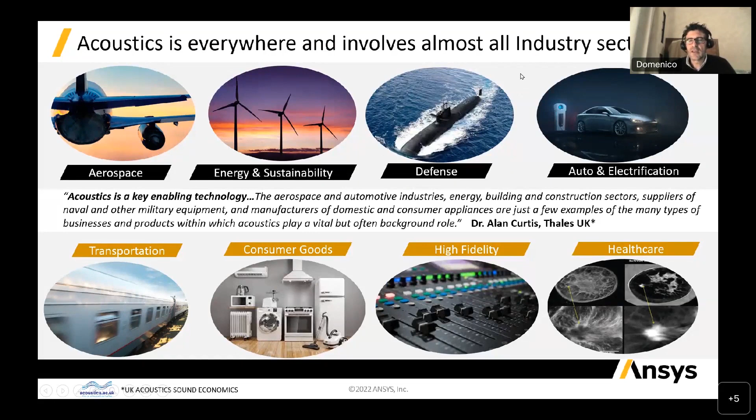So in the next few slides, I want to give some highlights about these trends in a few industries where we see some more interesting new things emerging. So the first one is...

Aerospace and defense. What we see here as requirements driving the industry is really more stringent regulations for noise emissions. We see this both for civil aircraft, but also more regulation about airports, since airports are sometimes quite close to cities or populated areas. So it's not just about comfort and noise levels in the airports, but we also see increasing demand from customers - people are getting more used to quieter environments. Even in our day life in a car, and when we go into an aircraft, we are more sensitive to this compared to 20, 30 years ago.

We see also some very interesting trends that are emerging and are not consolidated today, but we really see this going in the future. It's a future for us as a consumer, but is already a reality from a design perspective. We have lots of customers, and we see already in the industry lots of research projects about hybrid electrical vertical takeoff and landing - what we call eVTOL vehicles - which could be used as city taxis, for example, in the near future. So even though we don't still see them in our cities, big companies are already investing in it and simulating this, because it will also be important from an acoustic perspective for noise emissions in cities.

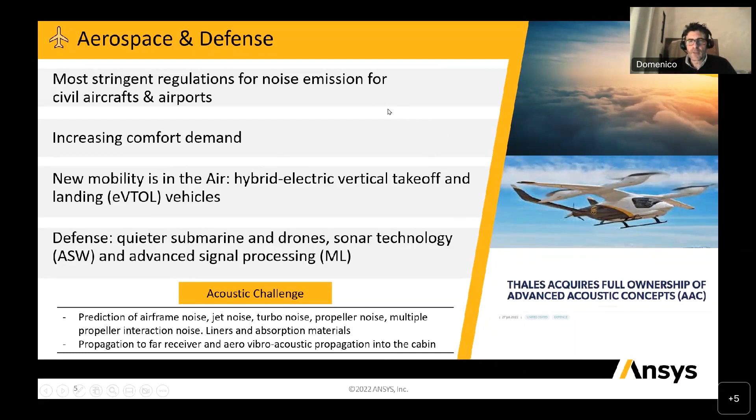To confirm the strong interest in all this, we have multiple research programs around the world. I won't go into details, but for example in North America, at NASA, just looking at the first line of this table shows how aggressive the target is. For noise emission, the target of this AATT project from NASA is to reduce noise levels by 32 decibels by 2025, which is really huge.

But their target goes really beyond that, going from 22, 32 up to 32, 42 decibel reduction, even up to 50 decibel reduction. This is really massive. You can see the perspective in the long run, up to the next 10, 15 years.

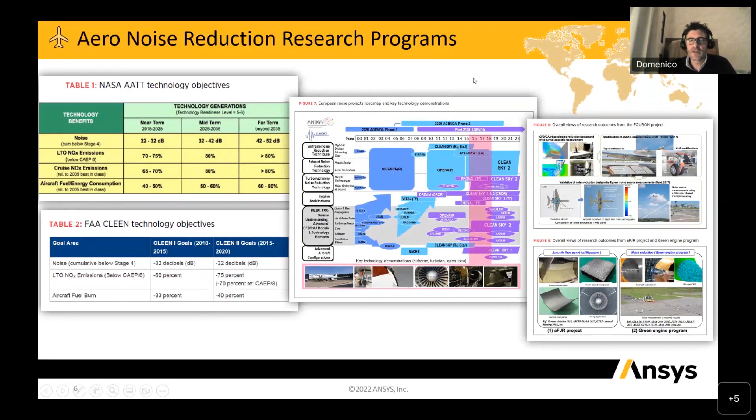In the central picture are some projects from Europe, and very important is the so-called Clean Sky project, involving all kinds of noise research to reduce noise. On the right are some projects from Asia, which are on the same line as the previous ones. So there's lots of investment in this area, and lots of cascade technologies that can go into different industries, as always happens with aerospace industries.

The second topic I want to talk about, which is maybe one of the big experiences in our daily life, is about the automotive and transportation industry. Here, as Dr. Venki was introducing, we see a new challenge - electrification, which is posing a completely new perspective in terms of acoustics.

On this right-hand picture, the first plot shows the internal combustion engine noise sources. In classic cars with a petrol engine, you see that half of the noise is coming from the powertrain, and then you have other noise sources like road tire noise and wind noise. But once the vehicle becomes much quieter, as in the plot below, with electric powertrain becoming smaller in terms of noise amount, all the other noise sources become more relevant - this is quite interesting.

So now we are all more interested in these other noise sources, in addition to the different kind of noise coming from the electric motor. Also, sound quality is now perceived more and more as an indicator of car quality. Before, as you might remember and experience, only the segment of luxury cars had this capability to be very good in sound comfort and quality.

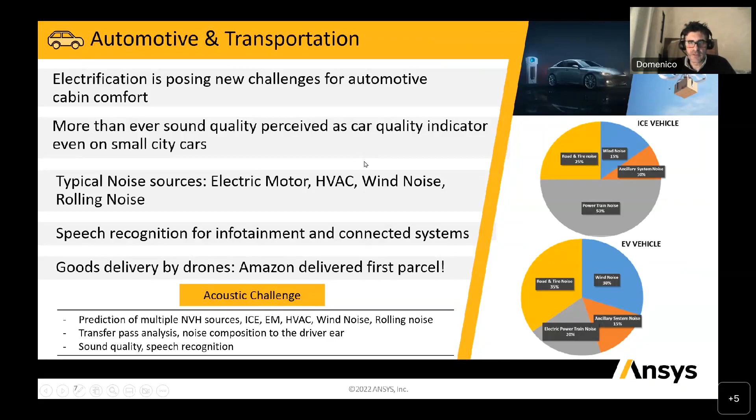And then, as I said, sound quality and speech recognition are the other challenges. The other trend we see emerging is really related to sustainability and energy.

Examples you can see in these pictures are like wind turbines, but wind turbines will not only be in this very picturesque setting on top of a mountain, they are becoming more and more pervasive all around, including in populated areas. And it's not just one, generally there's a numerous number of wind turbines put together in a big plant.

So this is becoming more important. Sustainability is creating more sensitivity to these aspects, and so there are now more regulations, not just about pollution in terms of CO2 emissions, but also in terms of acoustics.

The other thing we see as a future trend is smaller, house-mounted wind turbines, which could be mostly vertical, but we have also seen some horizontal examples.

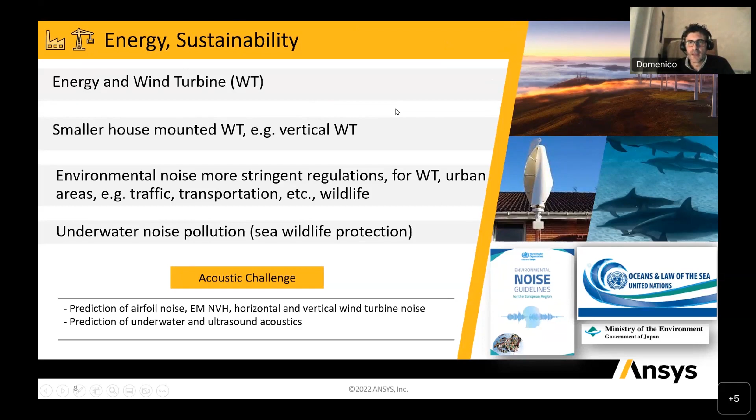And with this, I will pass to Patrick to go more into the detail of acoustic sound aspects.

Thank you very much, Domenico, and thank you SAE India for giving us the opportunity to present the challenge of acoustic and NVH for India, and for all Asia. There is no doubt today, as Domenico mentioned, that noise pollution has a growing importance. We can see many articles and papers explaining why noise pollution has become a major problem for human health and for the environment. Let's go a little bit into the details of the effect of noise on health.

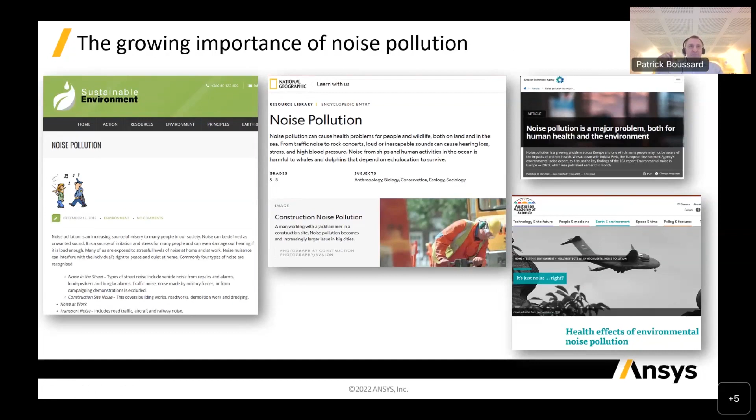One of the most evident effects of noise on health is hearing loss. If you lose partially or totally your hearing sense, even until being deaf, it really affects your life. This happens to workers who have worked all life long in factories, for instance. Now the trend is to have better monitoring of noise level in factories and for workers, and it's more controlled, but we should still be aware that this is the most evident effect of noise.

But noise also has a lot of effects that are not always evident, such as disease and psychological disease, for instance when it affects the quality of sleep. Concentration or learning trouble can be a side effect of bad sleep. It's difficult to learn or to teach if you don't have good sleep, but it can also be a direct effect if the school is close to the airport or a highway with low isolation.

Then it's evident that all these troubles have a social cost, an economic cost, and also an industrial cost.

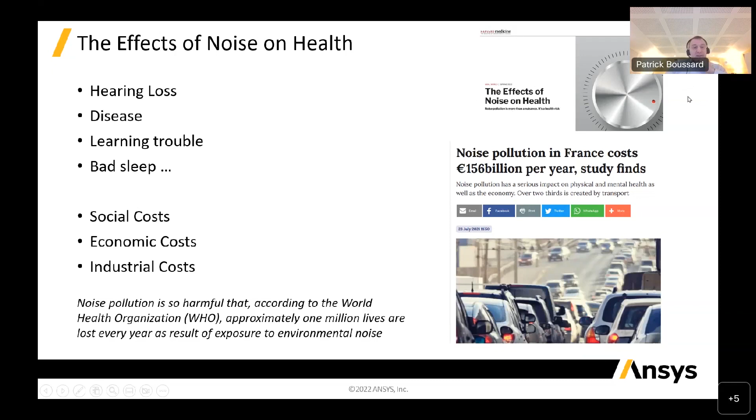Well, saying this, let's see the advantages of acoustic comfort, better soundscape, and noise control. For sure, all that we saw previously regarding health effects will be highly reduced or totally avoided. Better concentration is one of the most important effects if you have a quiet room where you can work or learn. Also, hearing conversation and better communication is definitely one of the most evident benefits - it's difficult to speak when it's noisy, and it's difficult to communicate even with an active noise cancellation system in a noisy environment.

Another way acoustic comfort and a quiet environment help is that they allow us to just listen and enjoy the environment and the natural soundscape. Reducing noise annoyance also helps to preserve nature and wildlife, as Domenico just explained with the dolphin for instance.

Another advantage of acoustic comfort and a quiet environment is that we can use sound to bring information, to bring pleasure also. We can create sound to be an alarm to warn pedestrians for electric vehicles, for instance, and this sound will be clearly audible - something that cannot be achieved if the soundscape is too noisy.

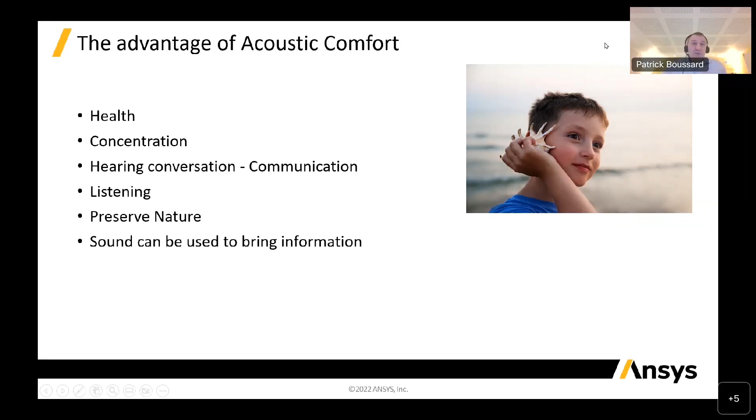Then, moving from noise pollution towards sound quality is a long journey, a big challenge, and it can only be achieved step by step.

And we have different steps toward acoustic comfort or quieter noise. Next, please.

This is already a big step. The next step is when we reach sound quality. Reaching sound quality is the ultimate challenge when you are an acoustic engineer, an NVH engineer: to master the sound. We want you to be a kind of chief orchestra, no more just dealing with noise pollution or quieter noise, but also controlling the noise and giving your product a brand identity. We want you to be able to control and master the noise as if you were a chief orchestra.

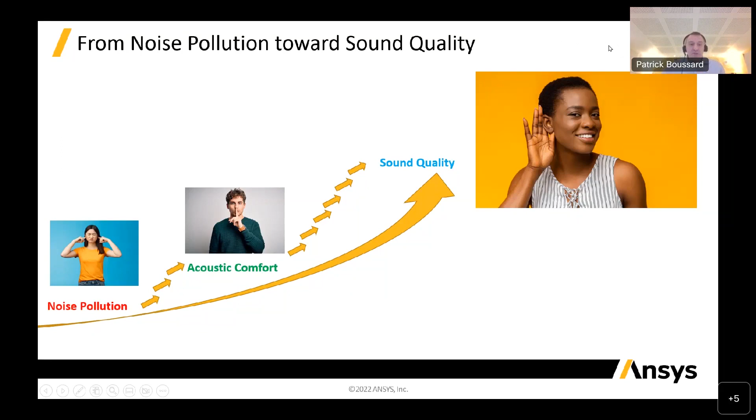For sure, we don't want to create a noisy exhaust system, but we know for automotive sometimes the sound of the powertrain is important. We have some solutions, the active sound design solutions for automotive, to create noise inside the cabin and not outside the vehicle. Then we can give back the power sensation without contributing to noise pollution.

The advantage of sound quality for a product will also reduce and avoid complaints about the sound, and improve the overall perceived quality. If you have a good slam door sound in a car, it could be in a conscious way or not, but the overall perceived quality of the product will be improved.

Mastering the sound will also enable you to match regulation, and maybe to anticipate regulation, because noise is now monitored and under regulation step by step in all countries.

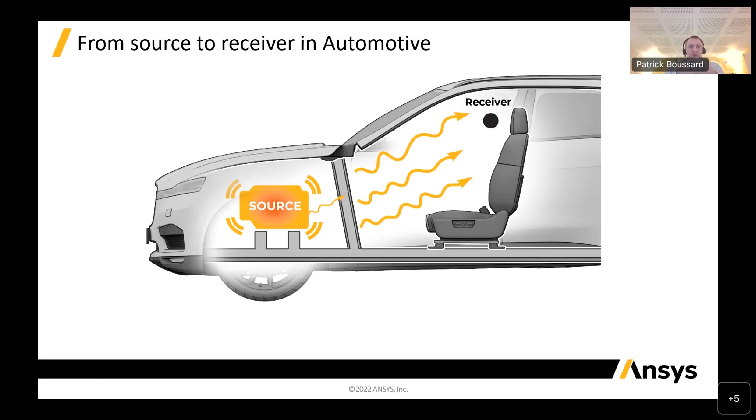It creates some vibration, and those vibrations will create acoustic waves. It will go to the front panel, and the front panel will vibrate itself and go until the receiver. This is the airborne conduction.

In addition, we have also the powertrain on the mounting blocks, and that will create some vibration under the structure of the chassis and the body of the car. All the body will vibrate also. This is the red path, and it will create the structure-borne conduction. At the end, it's airborne because it arrives at the receiver.

After these two sources, we have also the aeroacoustic sources. We can also call it wind source. Wind source is coming all around the car. It creates some turbulence, and this makes everything vibrate, especially the windshield, and the windshield will propagate also until the receiver.

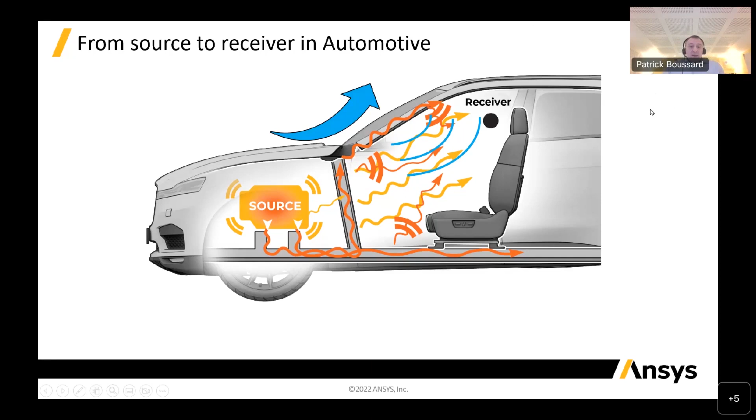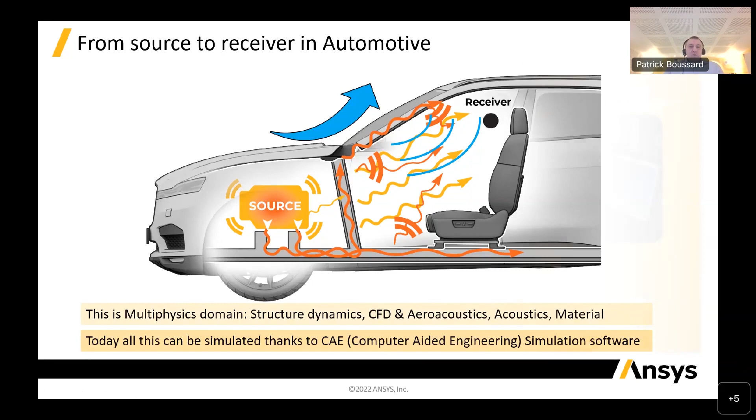We can see how complex propagation is inside the car, and this is clearly a multiphysics domain. It includes structure dynamics, CFD and aeroacoustics, acoustic propagation, and material. The advantage today is all this can be simulated thanks to CAE simulation software. At Ansys, we have many software connected all together.

This can deal with measurements coming from test bench or real situations, or the results can be gathered coming from different simulation tools. One of the most famous in Ansys is Ansys Mechanical.

And if we have the coupling with Ansys Maxwell, we can simulate the full e-motor noise, using the finite element method solver for vibroacoustics, we can simulate many things in this domain. Another flagship product of Ansys for CFD is Ansys Fluent, and this can simulate the sound of air conditioning, of cooling system, of wind noise over the windshield, as we saw previously.

For the gearbox, we have also Ansys Motion, and multi-body dynamics can be simulated thanks to Ansys Motion, such as a gearbox, because e-powertrain is not just the e-motor, it's also combined with the gearbox, and this also creates some whining sound.

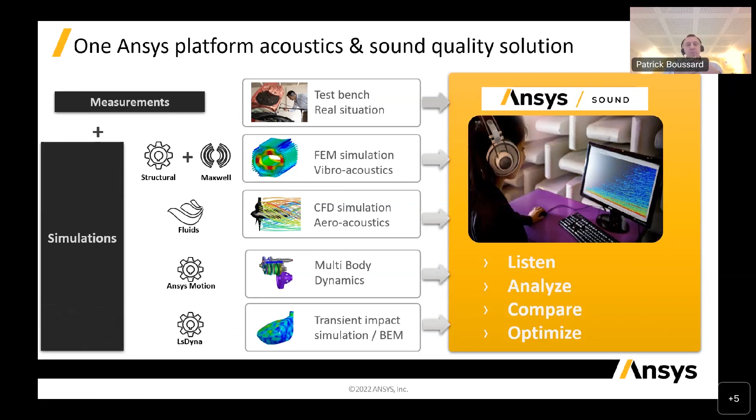I would like to also mention LS Dyna. LS Dyna has a very powerful BEM solver. It's used for crash test, but any deformation system can be simulated with LS Dyna, especially for everything with transient impact simulation. They have a BEM solver, very powerful to simulate all the propagation phenomenon.

All these results from simulation and measurement can be gathered in one tool, which is Ansys Sound. And then we are able to listen to the sound. We can analyze and perform acoustic calculation and psychoacoustic criteria calculation.

We can compare the sound. You can compare the sound of two different designs of e-motor, but you can also compare the sound of one e-motor virtual prototype and the real prototype and check if it's close or not. And if you want to optimize, you can design with Ansys Sound some target sound and then try to modify it with the CAD to achieve that sound.

Let's give an example of multiphysics simulation for the e-motor. For the e-motor, the most common noise is due to electromagnetic forces, and those magnetic forces are creating a radiation of the housing of the e-motor. With Ansys Maxwell and Ansys Mechanical, we can simulate the run-up and the pure tones emerging during this run-up.

This can be calculated into Ansys Maxwell and Ansys Mechanical. Then it can be analyzed, and we can make it hearable with Ansys Sound.

But we have also the CFD components, and the CFD component is due to the cooling system, because the e-motor is a source of heat, and to monitor and control the heating, we need a cooling fan, and this is typically aeroacoustics that can be calculated and simulated with Ansys Fluent.

Based on the RPM, there is more or less sound, and this can be gathered into Ansys Sound to combine and to evaluate the importance of each source. And we can work, thanks to simulation, on a specific given RPM, for instance, to work on optimizing the e-motor sound.

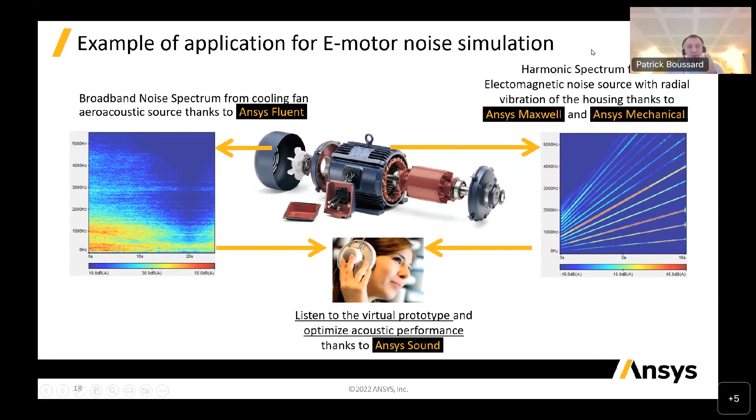I would like to share the global vision of One Ansys NVH offer for the full simulation workflow, but also including human in the loop. We saw previously that we can deal with different component simulations with Ansys Sound, Ansys Motion, Ansys Maxwell, Ansys Mechanical, Ansys Fluent, Ansys LS Dyna, into Ansys Sound.

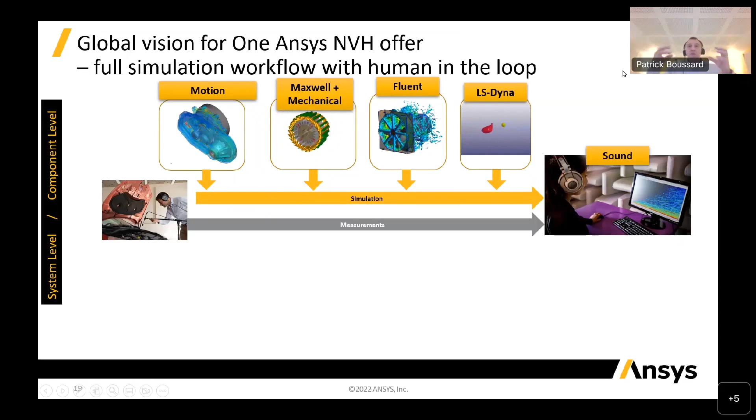Sometimes it's also an advantage to use some measurements, and we can deal with measurements. And this is all about the components. If we go to a system level, we need to consider all the transfer path analysis.

And for the transfer path analysis, we can use test measurement, or we can use simulation. And we can deal with, as we saw previously, the structure-borne connection or the airborne connection.

But because most of the time what is important is the human perception, it's important to be able to do listening tests, psychoacoustic experiments. This can be done in one lab, but this can also be done in a driving simulator.

Another step toward the real situation is when you use in-vehicle experience. The advantage of electric vehicles, and a high-end electric vehicle, is that they are very quiet. Then we can simulate also new types of sources while driving a real vehicle. We can see how much we go into the details to take account of human in the loop of NVH sound design.

And then, given this, we can manage the importance of the perception of different sources altogether. We can check which source is the most important, and we can also optimize the design of the unwanted source based on acoustic criteria, psychoacoustic criteria, or listening test experiment results.

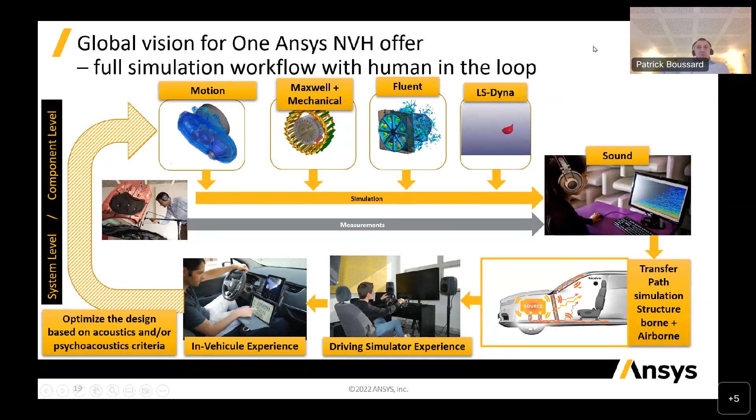For aerospace, we have one very good customer, which is Airbus Helicopters. Airbus Helicopters is using our tool in many different ways. They use recordings or CAE simulation tools, which could be internal tools or commercial tools.

Ansys has provided the 3D sound playback system for the soundscape rendering. Then in a lab, they are able to hear what will be in their future helicopters. We can run psychoacoustic indicators, including some special ones dedicated to aerospace. They can perform listening tests and assess the acoustic comfort.

They can also, from a marketing point of view, make the sound audible and choose different options of acoustic treatment if it's a VIP helicopter, and listen to the sound before manufacturing. Then the customer can choose the acoustic performance based on real listening experiments.

Once the helicopter is delivered, sometimes they can face default detection. They can feel bad sound, and sometimes they need to work on crash investigation. Both this default detection and crash investigation, our tool can also be used for.

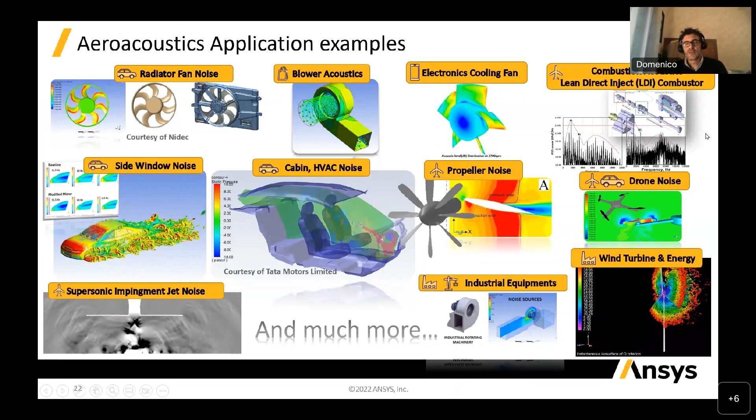But how do we achieve that? What are the technologies and methods? This is just a snapshot showing that in Fluent, we have different methods and technologies. We go from broadband noise models, to the right to acoustic analogy methods, and then to direct methods. We also have a coupling of acoustic analogy and direct methods, which we can couple to Ansys tools, but also to external tools.

This is also about the accuracy of the turbulence modeling, about the solver technology. We have also embedded some capabilities from Ansys Sound directly into Fluent, and I will show you a small example. But I'm also very excited to talk to you about some evolving technologies in terms of solver.

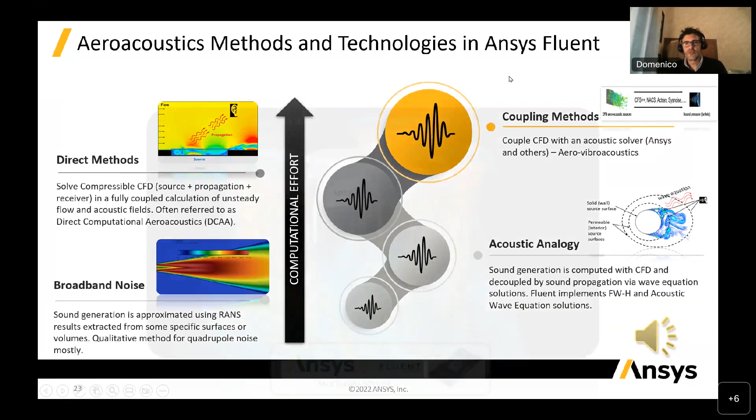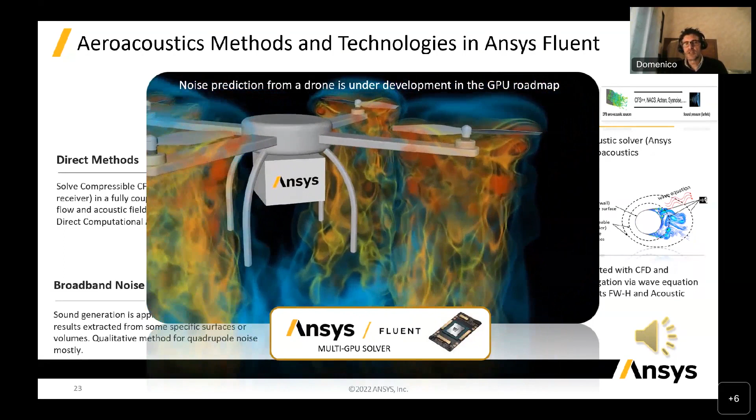In Fluent, we are developing, and we have the first release in January, a GPU, multi-GPU solver. This means simulation can be accelerated by a factor of 10. This is an example of a prototype on a drone simulation. Noise prediction is absolutely in our roadmap for GPU.

In addition to that, we already implemented some features directly into Fluent. We have a very good workflow, which, as Pat has shown, really connects Fluent to the Ansys Sound platform. One example is what we call 'listen to your simulation.'

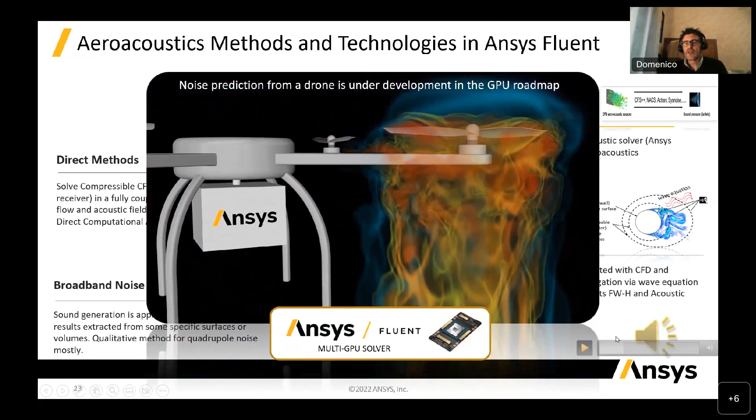This is an example of the sound coming from a drone simulation, and this file you can directly create in Fluent. You have much more advanced capability in Ansys Sound, but there are some capabilities already exposed in Fluent, with a very nice workflow to the Ansys Sound platform.

Okay, so let's go now also to talk about mechanical acoustics, and very briefly, because we have 2 dedicated sessions, as I will recall, next to go in more deep dive. So this is just like an introduction about what you will see more details in the next webinar.

So mechanical acoustics, also to be able to address the challenges that we've shown, needs some advanced solver techniques, and we have really FEM methods, BEM method, but also statistical energy analysis methods.

And then we can go adding more physics and considering the vibration, and so we have all vibroacoustics applications. Here we have the radiation and the propagation, and here we have a structure which is immersed also in the fluids. Some examples might include speaker sensitivity, propeller vibration, also underwater, and all automotive NVH - they fall in this vibroacoustics area.

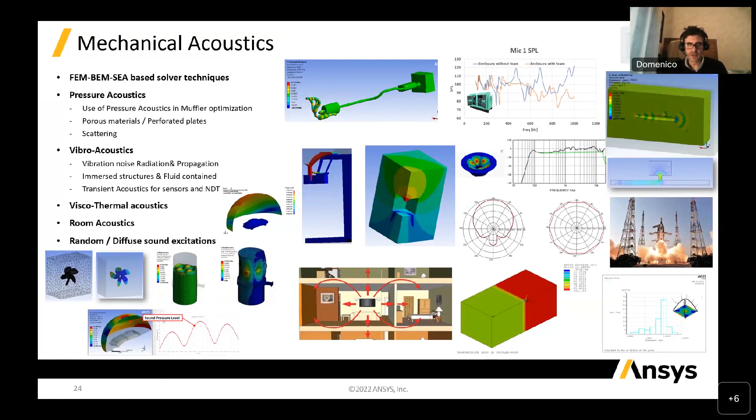Then we have room acoustics, and then we have random diffuse sound excitation. An example is a launch vehicle where this noise is not just really affecting the human being, but it's so strong that the vibration induced by the noise can really damage the delicate satellite structure. So this is really an important problem, and this is of a random diffuse sound nature.

And then generally, most of the problems are treated more efficiently in the frequency domain, but we also have transient acoustic capability. An example is parking sensor analysis, that is done in transient to have really realistic time domain simulation. And what Patrick was also mentioning is about being able to consider impact noise.

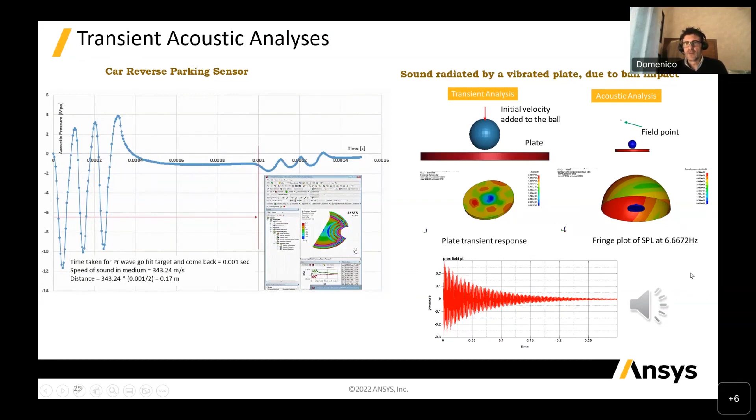Now going forward, between fluids, mechanical, and the other physics, as we have mentioned, we can couple these physics together, and we have also a good amount of validation on that. One example being the automotive case that we discussed before by Patrick, and we have validations covering simplified models up to real car models, or simulations and applications done for vehicle launch systems.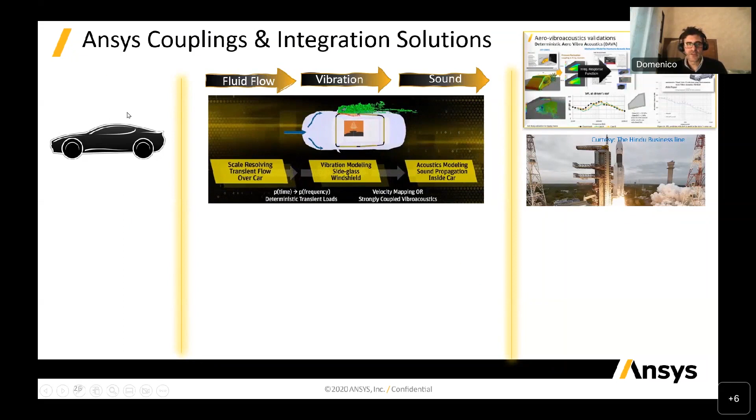But also, when we consider that excitation is not just the fluid flow, but can be electromagnetic field, harmonic forces, then they go to the vibration and sound, and this is also a coupling, let's say, of physics between electromagnetic and vibration. We have a nice workflow for electric motors and all this kind of applications.

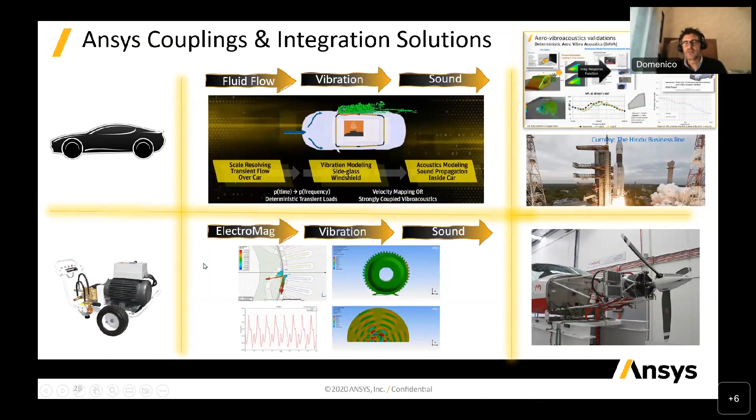So I would like just to recall, as Dr. Benki did at the beginning, that this webinar is an introductory webinar, and then we have two more sessions. So save the date, because we are really excited to go more into detail about mechanical acoustics, and this will be on December 15th, so 1 week from now.

And we have our expert colleagues, Santosh, Ravi, and Yanhai, who will go through more details about CAE NVH simulation, involving testing and simulation, and how you can optimize the acoustic performance.

And then for whoever is interested more in, let's say, noise generation by fluids, we have a deep dive on December 21st, where we go more into the details about fluids and CFD acoustics, which we also call Aeroacoustics. And we look also not just at Fluent, but also at multiphysics simulation and how all this is also integrated in our Ansys Sound platform.